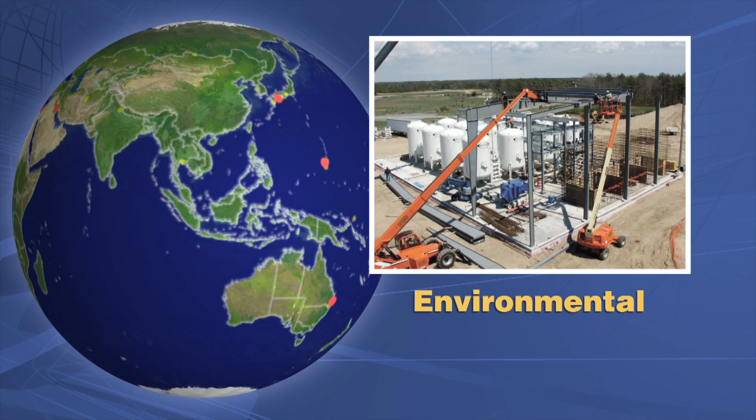ECC, an employee-owned company, was founded in 1985 to primarily serve the interests of the federal government. ECC delivers construction, design build, engineering and science, environmental, renewable energy and energy conservation, and munitions response solutions to the complex challenges facing our military clients around the globe.

One such firm fixed-price design-build project is the state-of-the-art Medical Education and Training Campus, or METC, at Fort Sam Houston, Texas. METC is an AFCEE and Corps of Engineers Joint Command project that centralizes Army, Navy, Air Force, and Coast Guard basic and specialty enlisted medical training. It's a 5-building, 700,000 square foot state-of-the-art medical training campus that will serve as the largest institution in the world dedicated to military medical training and education.

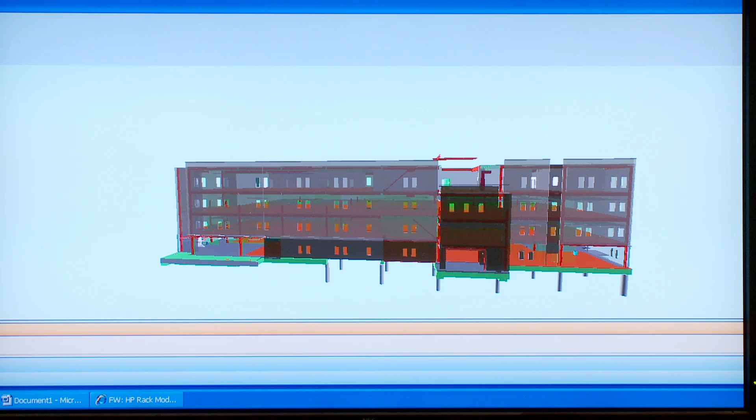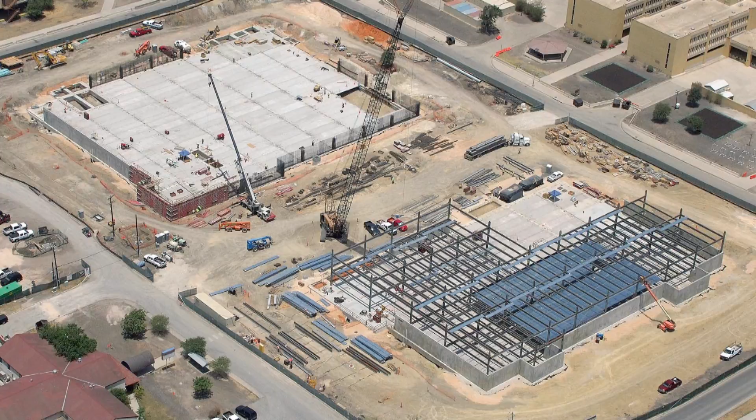ECC performed medical design build services to construct 2 4-story buildings on the METC campus, MIF Building 3 and MIF Building 4, valued at $127 million and totaling 420,000 square feet of medical facilities, offices, classrooms, and laboratories dedicated to military medical training and education.

24,000 students will cycle through METC each year, training to provide medical services to our troops in the field. Base Realignment and Closure made a decision that they would co-locate the training of all the enlisted medical training for all the services to Fort Sam Houston.

Dr. Scott Griffin leads the METC Transformation Integration Office, an organization created to manage the needs of each of METC's user groups and turn it into a functional project.

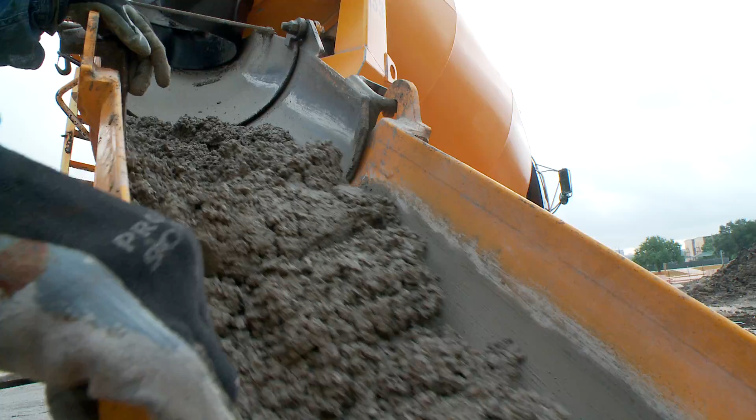Everything had to be designed, built, and completed in relatively a 3-year period. The design build gave us the ability to come out of the gate fast, to award these contracts, to get our team on board, and to get construction going in a fast-track process where we would actually have the package for foundations underway while we're still trying to design the interior of the building.

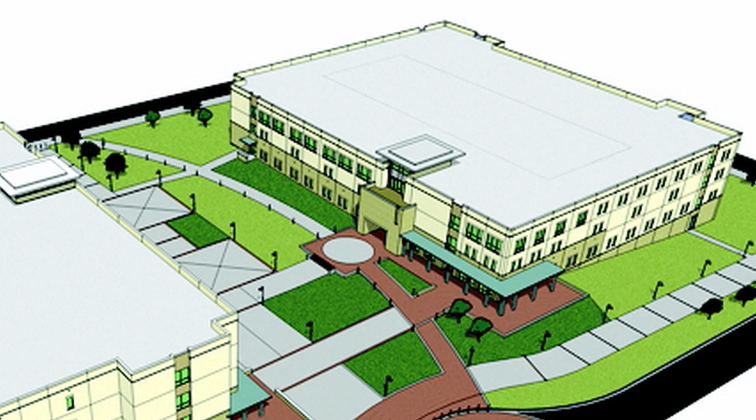MIF Buildings 3 and 4 were to meet the needs of 14 end users. METC TIO and ECC worked together to make sure all those requirements were met and to create a functional, LEED-certified design and construct it on time and within budget.

ECC's project manager, Bill Upton, and design manager, Eric Ripple, managed the project, along with design team partner, Burns and McDonnell. Design build was critical for this project because of timing and schedule for the government. They needed to have the first building up and functional within about 18 months because they had students scheduled in here.

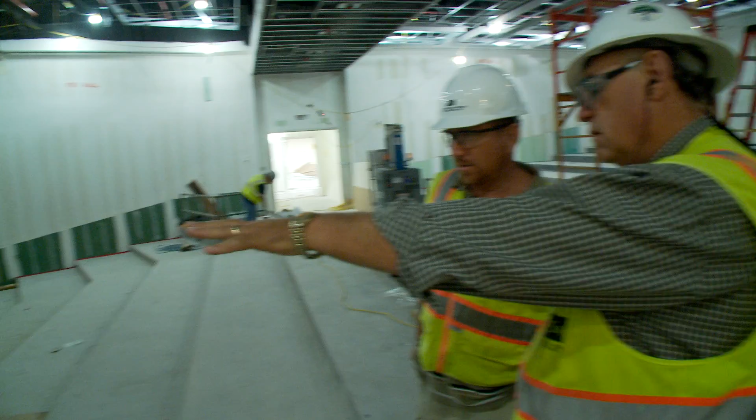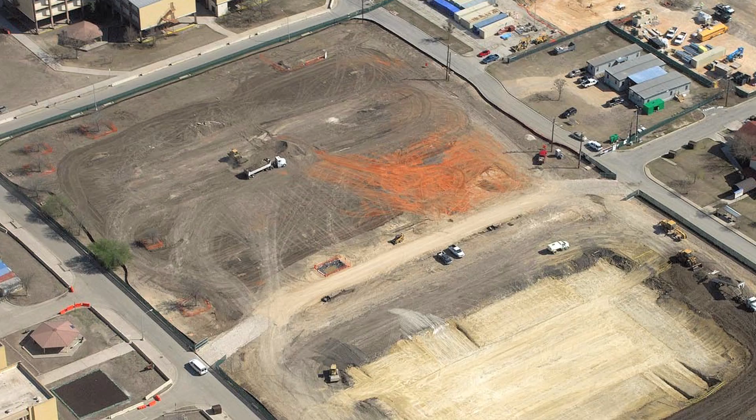Generally, it takes 18 months to design a facility like this, and we designed it and built it in 18 months. Equipped with a well-defined management plan, budget, and schedule, and the direction of the 14 well-represented end-user groups, ECC and its team officially broke ground on December 9, 2008.

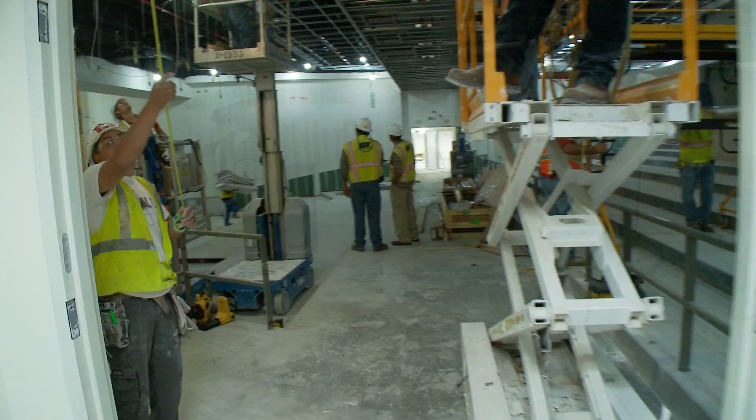Constructing multiple buildings simultaneously in a restricted workspace required detailed planning. Schedules were updated on an hourly basis, and ECC assigned a dedicated and qualified submittal manager to coordinate and manage submittals through the RMS QCS system, which allowed construction activities to proceed on time.

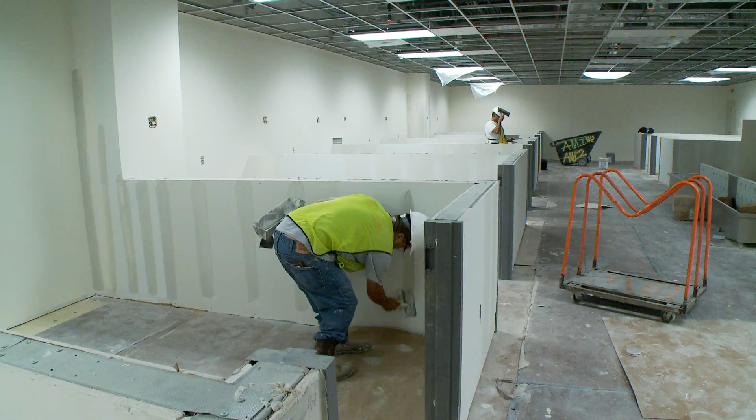Building construction was divided into phases to allow for a smooth transition from construction to building occupancy as efficiently as possible. As each building was completed, students and instructors transferred to METC from other installations.

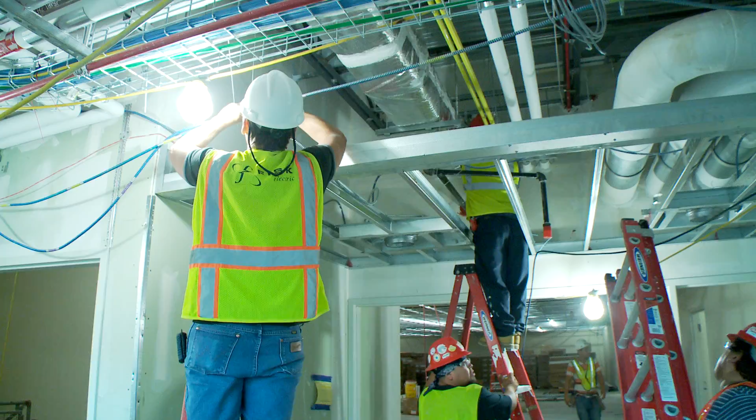Design was just barely out ahead of the construction process, and as soon as we had the civil package, we were able to start the civil work. And then as soon as we had the structural package, we were able to start the structural work. Building 3 and Building 4 were working just a phase apart, about 2.5 months apart on a big part of the project.

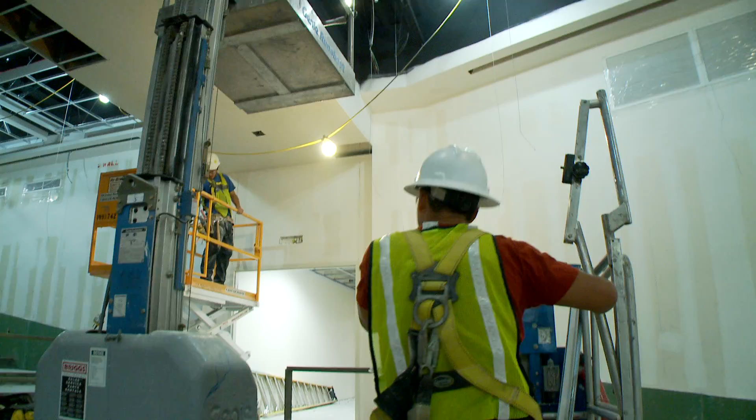The beauty of design build is it allows us to have the entire team in the room when we make a decision. So the designer or the user is not making a decision that when you get down to building, it's almost impossible to do or very expensive to do.

One of the things that ECC did that many of the others didn't is they had their designer here every week solving the little detail problems that inevitably come up on every project. Having the design team here working in parallel with the construction team, and then the open communications link with the Corps of Engineers and the end user, gave us a team approach that you can't beat.

At the beginning of the project, we were trying to pinpoint what the critical issues were going to be regarding design. And we could see early on that we had 14 user groups involved in these facilities. We needed to coordinate space with them prior to anything else. The space was going to dictate our structure and our mechanical, electrical, and plumbing systems.

And so early on, we set up a design schedule to meet with those users and to review our designs. And we broke it up into certain packages, the space planning being the first of those.

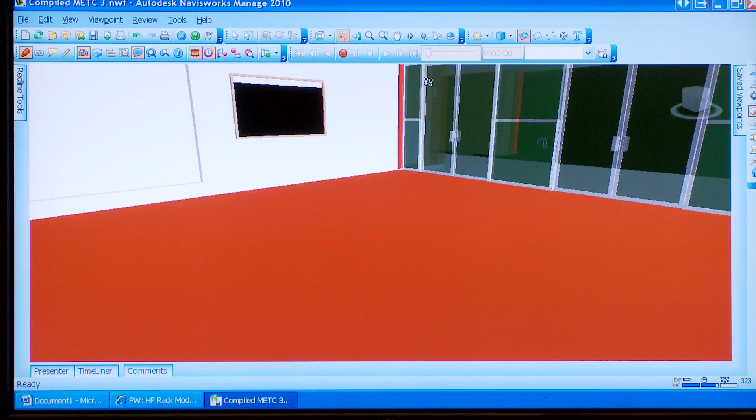The use of the latest technological advances helped us create a better system and coordinate a better project for our client. ECC used Building Information Modeling Software, or BIM, to design the buildings.

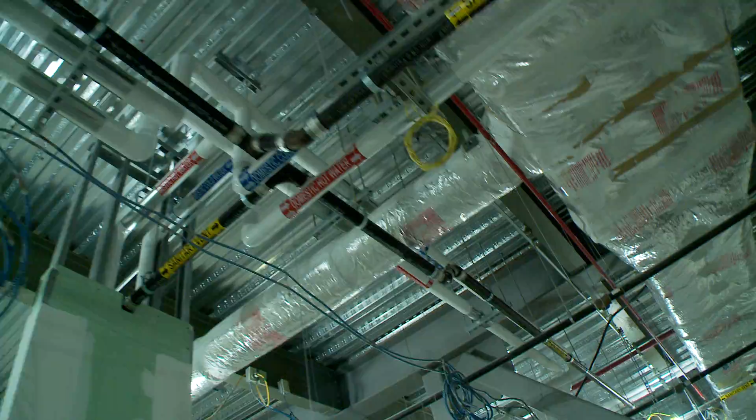A lot of times during construction, the drawings aren't fully coordinated. You don't realize, for example, that a duct might not fit underneath a beam until you get out to the site and find that out. So BIM allows you to model this entire project in 3D, and so you're able to see those conflicts prior to getting out to the field, which saves a lot of time and money.

ECC's Design Build Center of Excellence, or DBCX, played a pivotal role in facilitating project design integration during each phase of the design-build process.

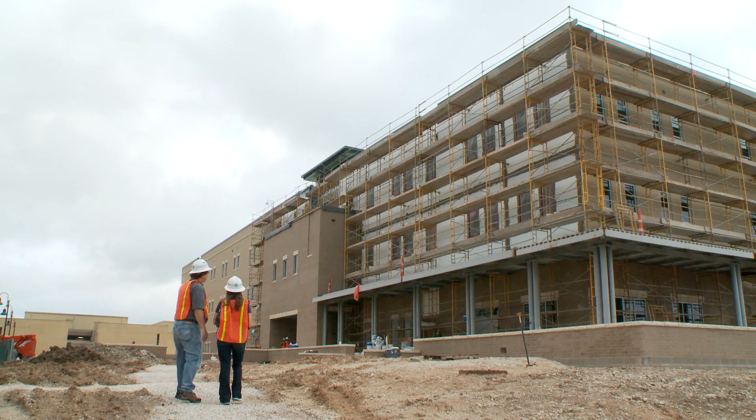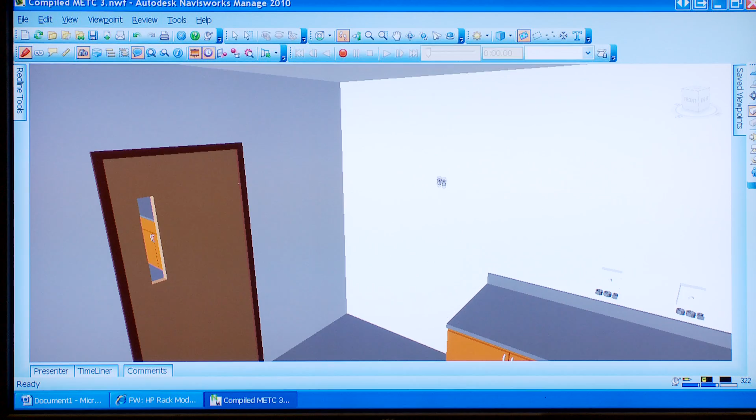DBCX consists of a unique group of specialized experts, including engineers, architects, construction managers, and estimators, who were hand-selected to oversee a smooth design-build process and to ensure workable and efficient LEED-certified designs at METC. We felt it was important to have a liaison that could speak to our designers, and at the same time speak to our constructors and our clients at an exceptional level, so those items could be coordinated throughout the process, because communication and acting as a team are the two most important things in the design-build process.

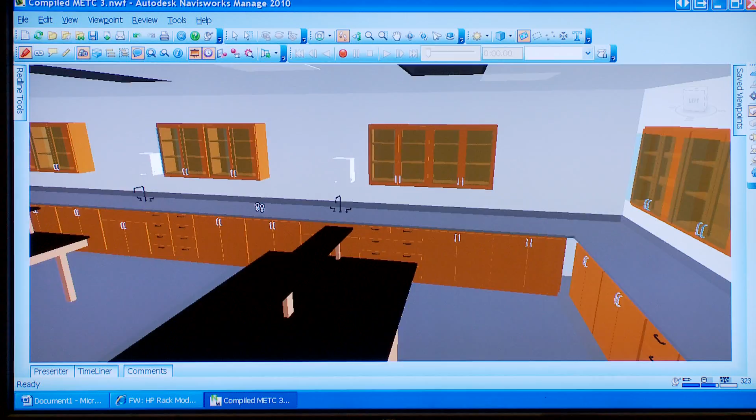LEED is Leadership in Energy and Environmental Design, developed by the Green Building Council, and is now nationally recognized as the benchmark for efficient energy and environmentally safe buildings. We were contracted and required to deliver a LEED Silver building. LEED has a point system, and LEED Silver is between 33 and 39 points.

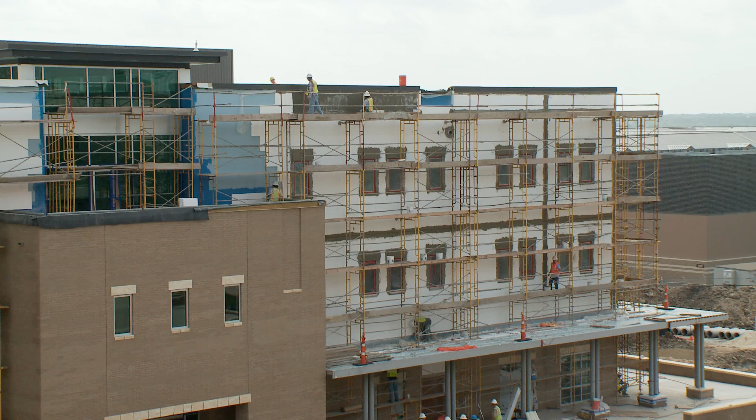When we saw that we could surpass that, we went back and looked at all of our design, we looked at our construction practices, and made an attempt to go for gold. So we're now going to submit this for LEED Gold based on having 44 points. We've been able to do this through efficient design and well-managed construction practices with no added cost to the government.

In addition to the METC project's on time, on budget, and LEED successes, the ECC team received back-to-back commendations and awards for performance, and excellent project ratings from its clients. ECC's commitment to safety was also recognized. The most important thing that we do as a company is get everybody home safe every day with all their parts.

The biggest challenge was the fact that we built two buildings simultaneously. That meant you had to be in a million places at one time, which is almost impossible. So that made it even more important to get employee involvement, to get everybody as a safety manager on this project.

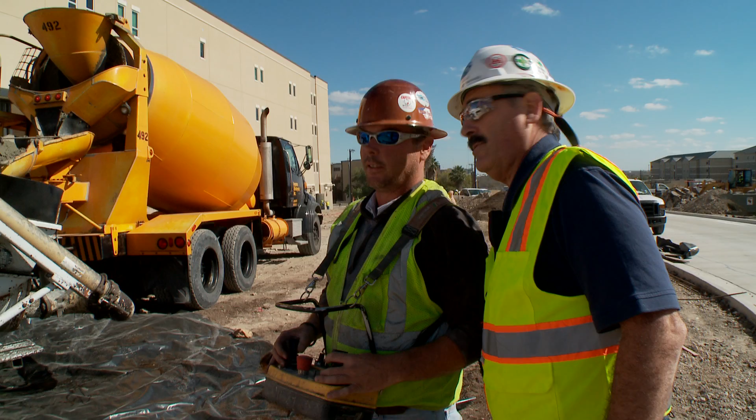David Wells oversees ECC's safety program at METC. OSHA recognizes that if you have a strong safety culture, you're going to be able to minimize the accidents on any given site. So we feel very strongly as a company that that's imperative. The key to the safety program being a success was employee involvement, management buy-in, inspections and audits, making corrections as we found them on a daily basis, and then ongoing health and safety training.

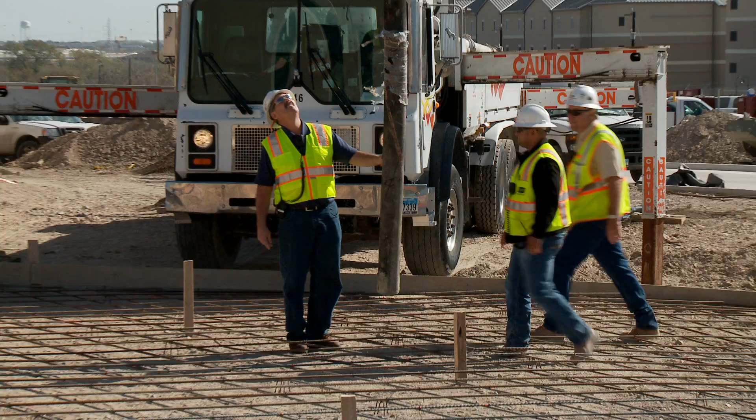You just want to make sure that you're safe out there. During the project, ECC San Antonio was honored with OSHA's Voluntary Protection Program Star Level designation. This prestigious honor is given to sites with enhanced safety and health management systems, resulting in exceptional health and safety performance, and a commitment to implement those systems year after year.

At the time of OSHA's review, ECC's 3-year incident rate was 57% better than the national average for non-residential building construction, and 56% better than the national average for days away or restricted work cases.

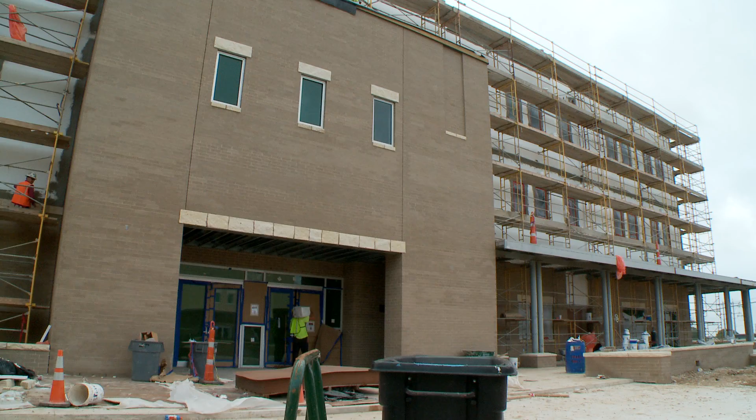In an award notification letter to ECC, OSHA wrote: 'Your qualification for OSHA's Premier Recognition Program is a testament to the efforts you and your workers have made to develop and implement a VPP quality, safety, and health management system. You have joined an elite group of organizations that provide exemplary occupational safety and health protection and serve as models for others.'

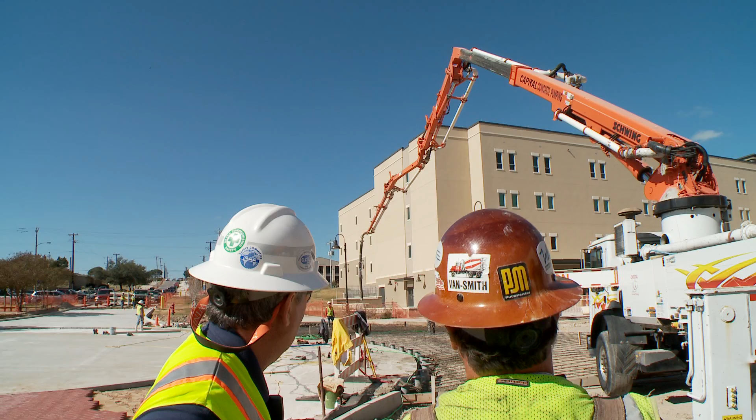I would say the crowning jewel was winning the yearly award last year for the entire Fort Worth district in the mega contract division, which is $100 million projects or above. Large contracts, and we were included in that group, being one of the smallest contractors basically in that group, but yet we beat out a lot of big people. And that's my motivation as I get up each day, is to bring them home safe at the end of the day. And I feel that I've accomplished something.

ECC's been a fun group to work with, and not just ECC, but their subcontractors, their builders. The team here has been easy to work with. Probably the number one variable in our business is communication. To have a contractor team that, number one, listens, and number two, is willing to work with you makes life much easier. On a personal level, it is important to know what the real purpose of this project is, and that's to be able to train our soldiers, to help our soldiers out in the field.

Not only out in the field, but here in the States as well. It does give you a lot of personal satisfaction to know that you've been able to contribute to that cause. The bigger picture is the medical training has changed so much, and that we've been a part of that, how they can save lives these days.

Part of the government's tight schedule was they want these students in the field. They need these medics that are being trained here in the field, saving lives.

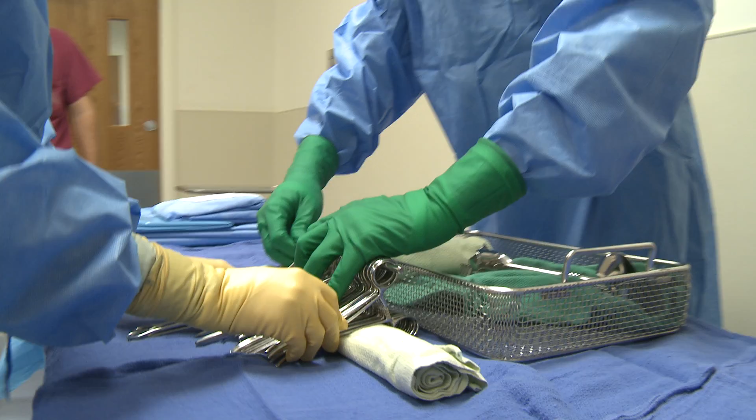What comes out of this, and it's really the reason so many of us are in the industry, is you can walk away from it and say, I did that. That's mine. It's got my name on it. There's 3,000 men and women out there that have worked on this job over the last 3 years that can walk away from it and show it to their kids and say, I built that building.

Personally, would I recommend ECC? I could and I will. I have.